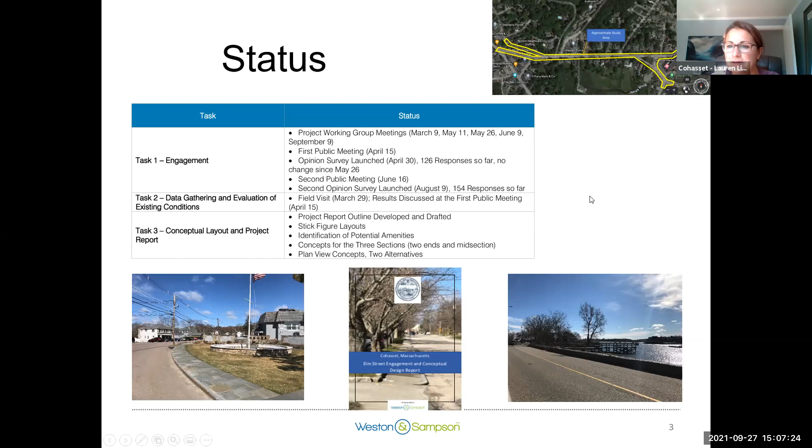All right, so at this point I'm going to turn it to Jeff and let him go through the changes to the alternatives that I just mentioned.

Thanks, Jim. So on alternative 2 on the village end, one discussion point was the connection to Highland Ave, and there was some concern with parking in that area and maintaining access. What was batted around last week was that perhaps the town could allow specific resident permit parking for 3 or 4 spaces to replace people pulling up onto Highland Ave, so you don't have cars cutting up into Highland Ave and backing out onto Elm Street across the new sidewalk areas. This hasn't changed, but it could be moved as we move forward in preliminary design if desired.

Go ahead, Jim, to the next page. Can I ask a question? Go back, please, because the consensus was that they were not going to do one-ways, so this is still showing the one-way configuration. That's Jim's fault. You probably don't have the other one up, Jim, so you're muted.

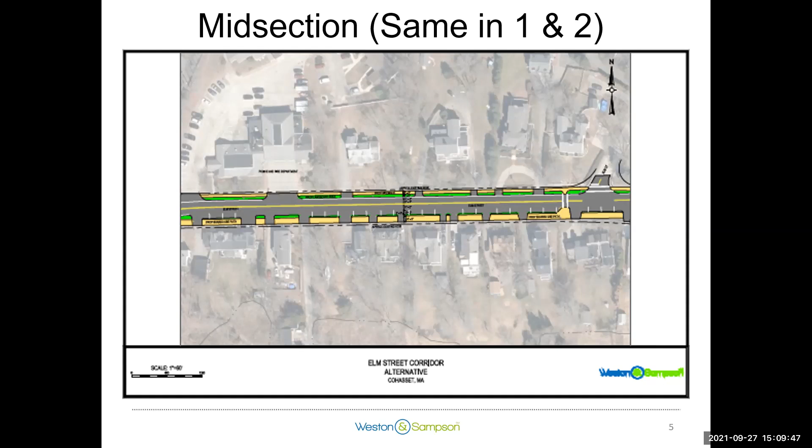Jim, go to the next one - this is zoomed in based on a conversation last week. We adjusted some cross-sectional elements to minimize the footprint. The sidewalk on the south was shown as 8-foot, and we're calling it a proposed sidewalk rather than a shared use path, just because that connotation pushes MassDOT and others into thinking it's a 10-foot minimum. This allows it to just be a wide sidewalk usable by bicyclists, younger bicyclists, pedestrians, etc. We'd still look at sharrow markings and possibly signage to get more seasoned, comfortable bikers to stay on the roadway.

One recommendation from the chief was to provide a 9-foot parking stall here instead of 8-foot, adjacent to the 11-foot travel lane, to give a little more room. On the north, we bumped the shoulder from 1-foot to 2-foot, giving a 13-foot width across. We've pulled the sidewalk to the front along the roadway, and right now I'm showing proposed grass because underneath is some old pavement from the old sidewalk, since there's no parking on the north. We've shown approximate locations of a couple telephone poles - there are a couple locations where the pole is more in the middle of the sidewalk. In those areas, we recommend bumping the sidewalk out a little to create more width on the backside to accommodate ADA considerations.

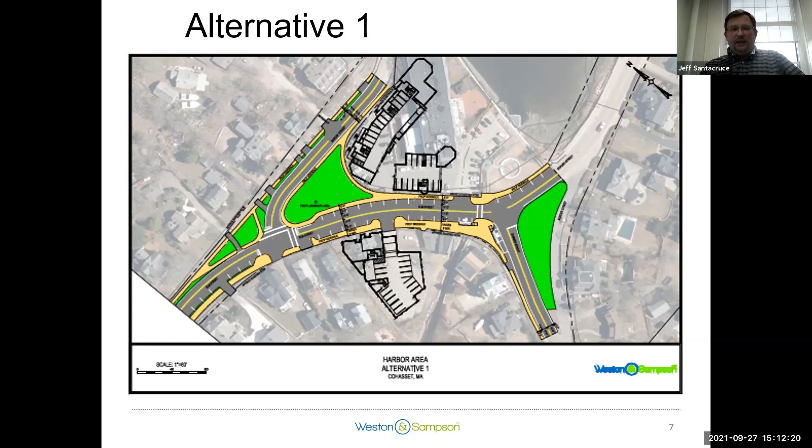So Jim, if you want, I can show that on the next slide. So this is what we adjusted. We basically carved into a little bit of the green space and created 5 more parking spaces here along this stretch.

And as you can see on the north side there, we pulled the sidewalk right up close to the roadway, to keep from having to deal with some steep walls and grading up to a few of those houses along the street. And we're still keeping 24 feet of pavement.

One consideration was how many more parking spaces we could get. The only concern is as we get toward that corner on Margin, the roadway curb to curb starts to narrow up. Certainly once we get into real preliminary design instead of conceptual, looking at actual CAD drawings and utility pole locations, there may be a possibility to add 1 or 2 more parking spaces and shift the road a little bit.

But to be conservative for now, we left it at this point, knowing it's easier to add an extra parking space than to show the public 6 and have to take one out later and have everybody question it. So, any specific questions on this one?

Yeah, I got a question. The curb cuts for the driveways - graphically, it looks like the asphalt from the roadway goes to the property line. And I would imagine there would be a drop off, like 2 feet from the roadway, and that the sidewalk would actually run in.

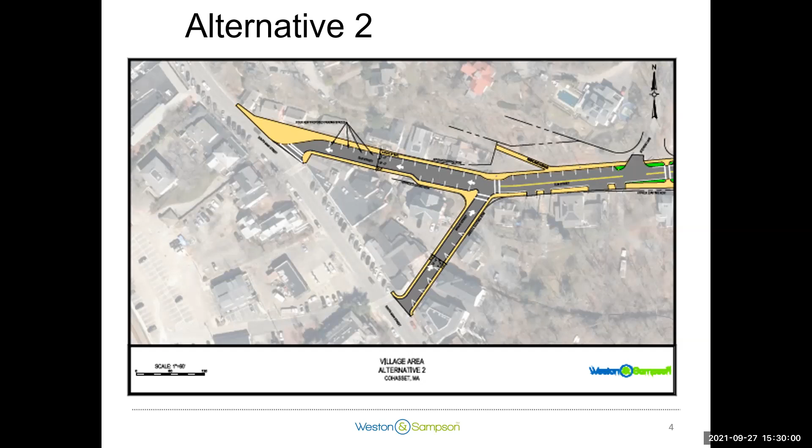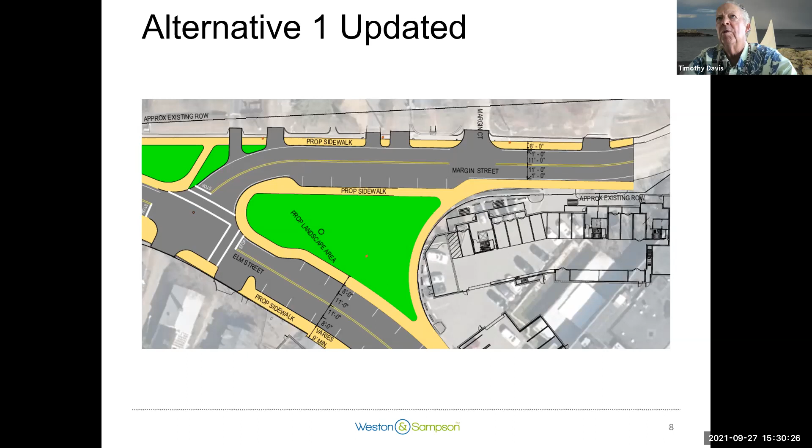George, I think there are a lot of people that like to have that one-way configuration, but we really do need to work on parking before we do. The consensus was leave it as is for now, but we'll address that hopefully when we're addressing the greater village issues.

I agree. I think the only issue with the intersection of Elm and South Main is that the pedestrian crosswalk is removed from the corner, and that's very confusing for pedestrians and motorists. The existing condition now - right, because you have no crossing across the end of Elm on that side of South Main Street. Correct. Yep, I hear you.

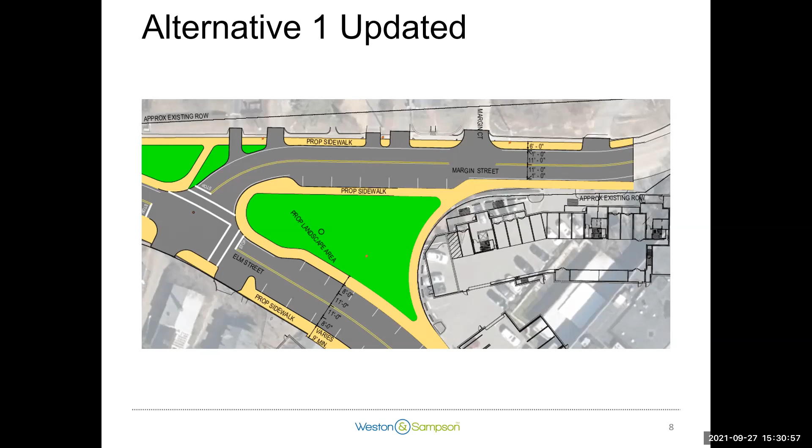All right, thank you. I think the chief has got his hand up. Can we back up to that middle section real quick? I just didn't know if I saw something or didn't see something. I know there's been a lot of conversation in the last two weeks about a crosswalk at Elm Court and Elm Street. Is that in here someplace on one of these slides?

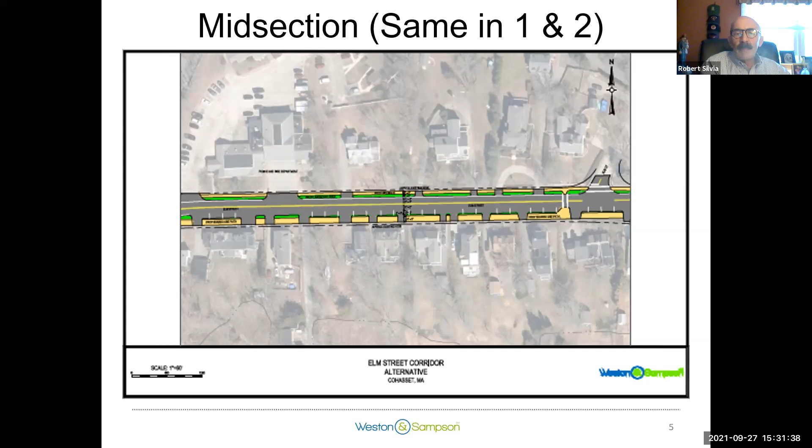I did not show it on this one. I think we decided we were going to put it in. Yeah, it's in the right-hand side of that plan, you can see it. It's just not in the blow-up because we were trying to condense it to a section that was easy to show. So it'd be over to your right-hand side, but it was still being shown.

I didn't see it at first, that's why I asked the question. It's one of those things that seems to be getting a lot of traffic at the present time. Yep, no, it's definitely still shown. There's that one there, and then obviously the ones at Margin and the realigned intersection, as well as one at Stevens. So that can accommodate the people coming from the elderly housing community, I believe, out behind the fire station.

Thank you. I think Jason has his hand raised.

In that midsection, I thought we were leaving the grass strip out on the edge to incorporate those utility poles so that they're not in the sidewalk. That was one of the discussion points we had mixed reviews on, but the concern was that the small grass strip would be difficult to maintain.

So that's why we recommended in the detail section, when we met with Mike Sardina, not to have the grass strip. But if we want to change that, that's for discussion. There are some spots, Jason, where those poles move a little further north, so even with a grass strip on the front, some poles may still end up in the sidewalk. With this option, we could do a short section of widened sidewalk into that proposed grass area to help get around those poles more easily.

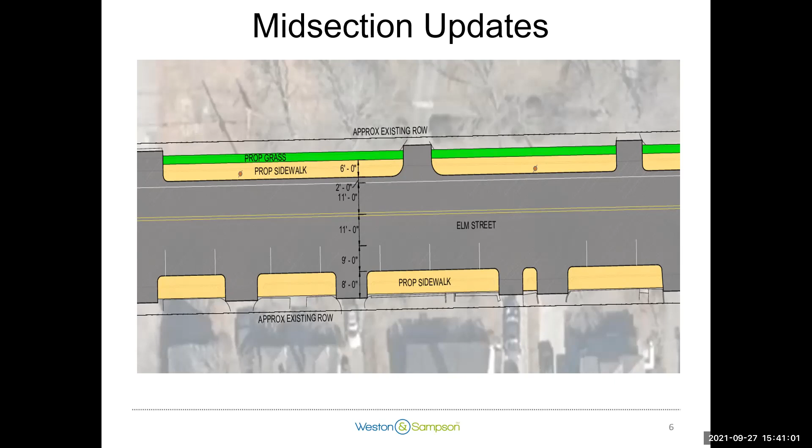I think that's a really good point, Mike. Thank you. Anybody else have any questions? I'll give it back over to Jim and let him kind of go. I think we're at the next section, Jim. Yep.

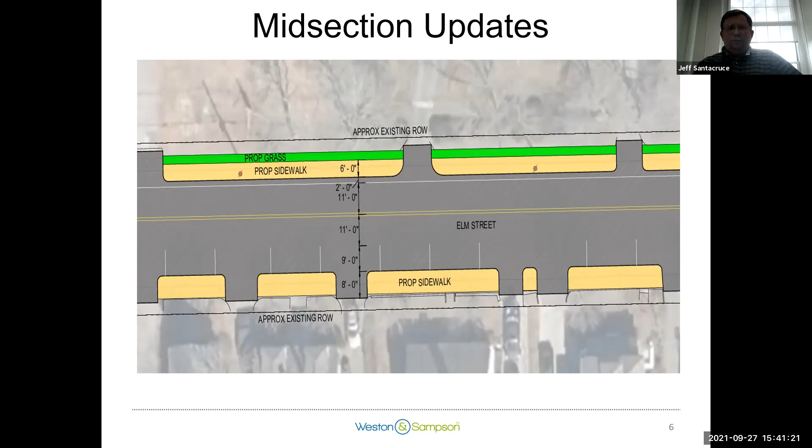Okay, next item to discuss is the public forum. What we've done here is outline what we thought would make sense to cover. So one question is how much detail should be included in the initial part of the presentation, whether we should do a sort of 10-minute thing up front, going through as reasonably quickly as possible to give people the opportunity to comment, or want to go through more detail than that.

Another question is whether to include the undergrounding of utilities, the decision making about whether that was practical or not. It's in the report, wasn't sure whether you want to air it out in the public forum or not. But other than that, main topics would be project background, what the study area is, engagement, what we've heard so far from folks through the public survey and meetings, observations from existing conditions, go through the conceptual layouts, and then budget and next steps.

Just a quick comment on underground utilities. I think that you would get some aesthetic and functional benefit from having underground utilities at the end where the harbor project is. Elsewhere, I don't think so. If there's a hybrid approach, as opposed to like, okay, it's $10 million to underground all the utilities in this whole corridor area.

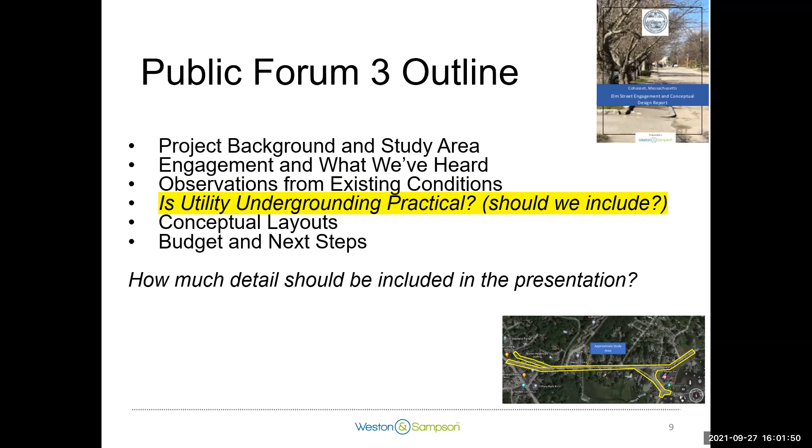I can't see everybody's hands and everything. Any other questions at this point? Doesn't appear to be. Okay.

So quickly, next stages of design include budget level design and permitting design, budget level being around 30%. Figure that to be in the 220 to 230 range, roughly the same for the permitting design. It's about the same level of advancement. And then the permitting itself, we think that's probably in the $30,000 to $40,000 range.

Public engagement, continuing meetings like this, more public forums, maybe some stuff in person, about another $50,000 to $60,000. And then final design, our understanding is you want to do this, roughly speaking, like a design build sort of thing with your on-call contractor in the town. So final design would be done in tandem with construction, built into the construction phase.

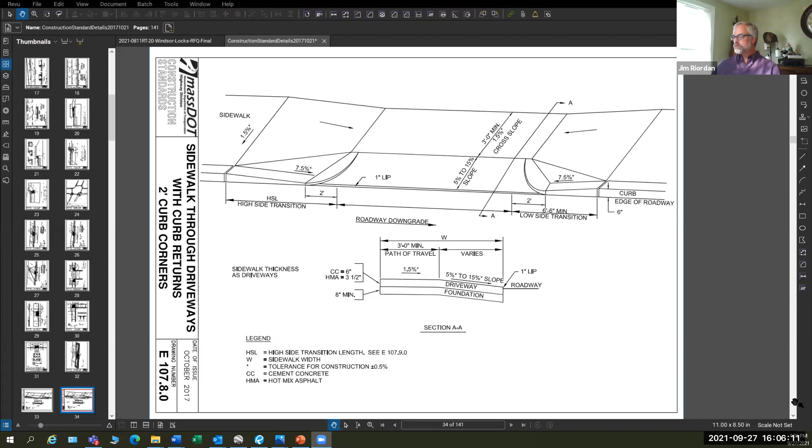And yeah, oh yes, it's coming up now. No, did it disappear? Which screen are you seeing?

That's the driveway curb detail I was talking about, Clark, where it goes up at the front. There's a little drop down on both sides to help the driveway. That's one option, with a straight curb and 2-foot curb corners on it.

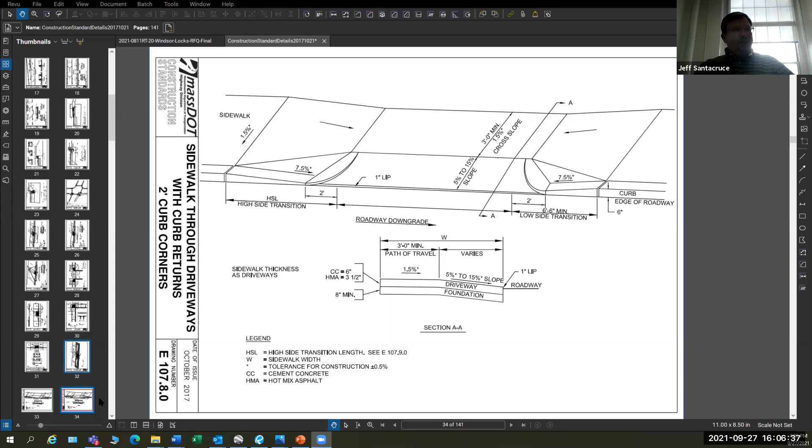The other option you can do is just a straight-in section, so there's no curve. Those are the two options we can utilize that every contractor in Mass knows how to build, so it's not like we're reinventing the wheel.

I thought I'd share that, and I can try to put something in the plan somewhere that shows the public that the sidewalk is the dominant piece through the middle, and then the driveway comes across. That's an important thing to convey as part of the graphics for the project.

Awesome. Well, thank you for bringing it up. I appreciate that.

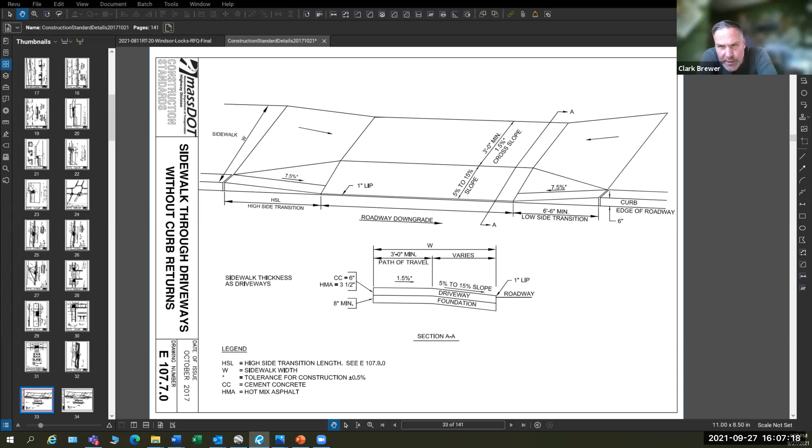There's both where the streets are, and the driveways might have a slightly different treatment. At the streets, the sidewalk would actually go down and become a crosswalk, so you wouldn't have this kind of transition at a street level, only at your driveways.

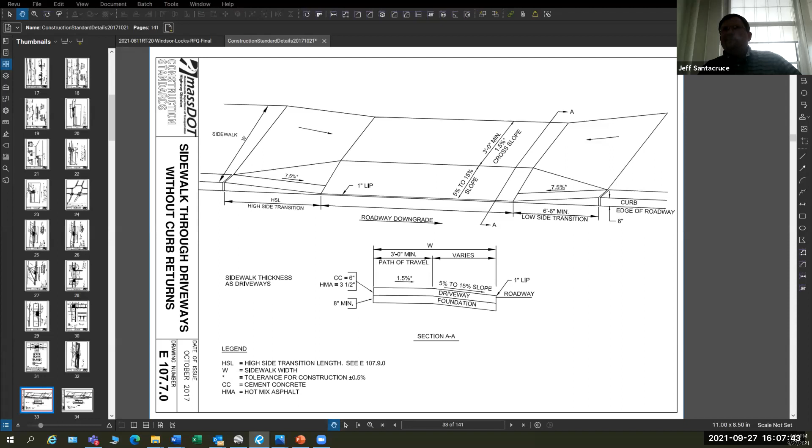All right, now I can't seem to stop sharing. Oh, there we go, found it. Sorry about that, thank you. I just figured I'd show that while we were still talking plans. Appreciate it, thank you.

Jim, you're on mute. Does the report cover up where folks can see it? Yes. All right, great. So, report cover.

Let's go down through this a little bit, just real quick. I think this outlines what's in the report pretty well. There's a general section on background in the study area, the engagement process we've used, data gathering, methods of review, evaluation of existing conditions, the undergrounding of utilities we were discussing a couple minutes ago, and then conceptual layouts and recommended budget and next steps.

This follows pretty much how we're suggesting doing the public forum too, ideas to make these things match up so it's easy for people to follow along. We'll just skip over the undergrounding of utilities.

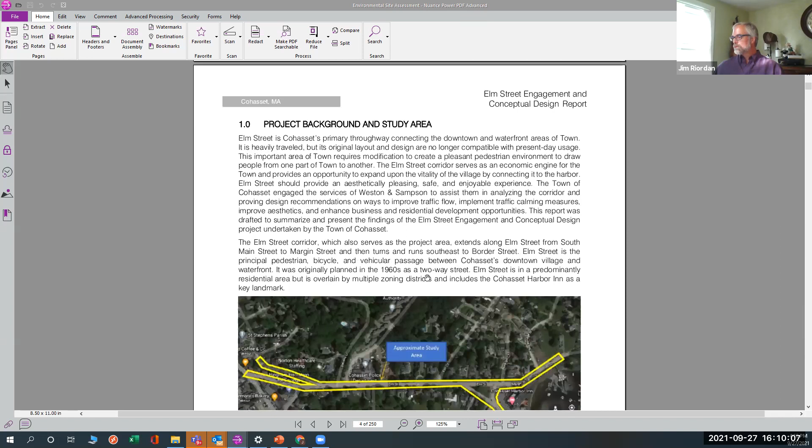So we all know where the study area is - this is how it's presented in the report. Just a brief discussion of the purpose of doing this, which is to improve the view corridor, improve parking, pedestrian and bicyclist safety, and slow the traffic down.

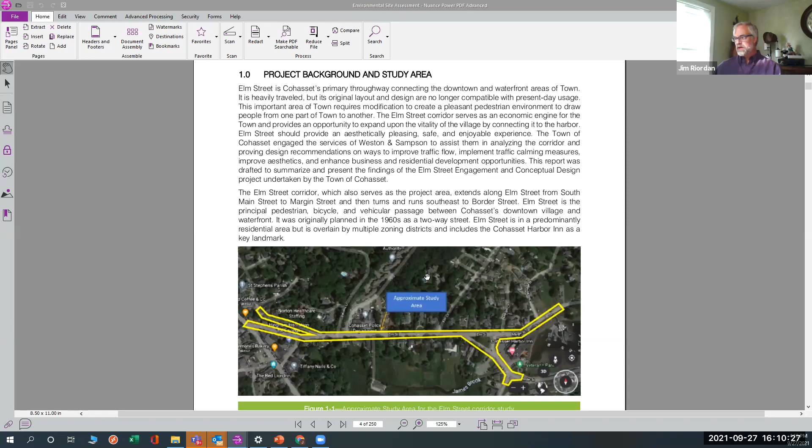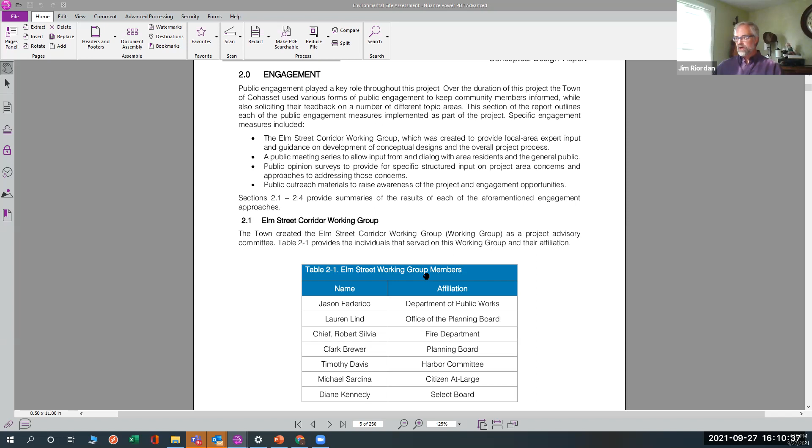Discussion of engagement begins with the corridor working group, which includes all of you, and the public meetings we've held - there's been 2 so far, there'll be a third. We can include the third one in here as well, but we haven't had it yet, so it's not in here at this point.

Public opinion surveys - 2 of those that I think identified some pretty interesting elements that we brought into the design.

Some key things about that in the first one - both of these have very good response rates. The first one had 128 responses, and it's 153 written up in the second one currently, but I think we're up to 154, so I'll just adjust that as needed.

The things to address that came from the first survey, in rank order, were wider streets, adding street trees, landscaping beautification, enhanced pedestrian crossings, adding bicycle lanes, traffic calming, improved street lighting, and wayfinding.

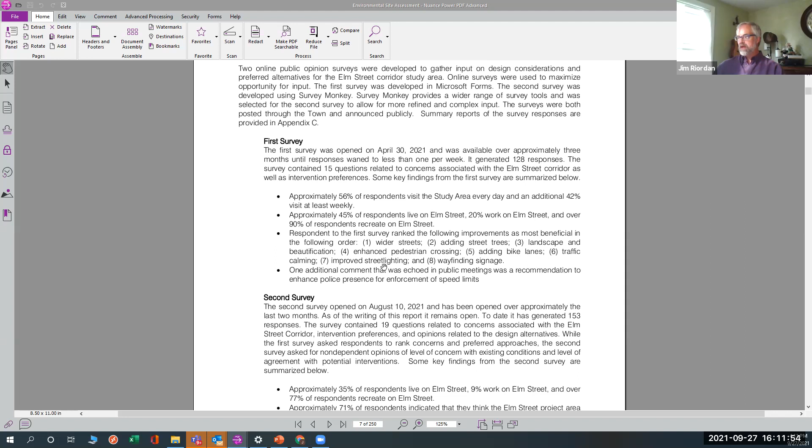And then in the second survey, we got somewhat different information. In this one, it came out that improved pedestrian safety, visual connection to Cohasset Harbor, improved roadway condition, increased roadway capacity for bicycles, and increased traffic enforcement were key elements.

I think both designs add to each of these things in various ways, but we queried folks as to which alternative they felt did the best job of adding these things, by asking whether they agreed or agreed strongly with certain items, just kind of adding those together. We have the percentages in here.

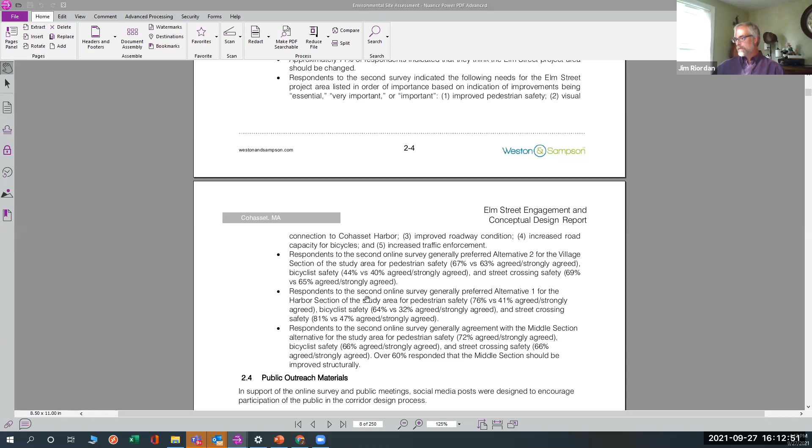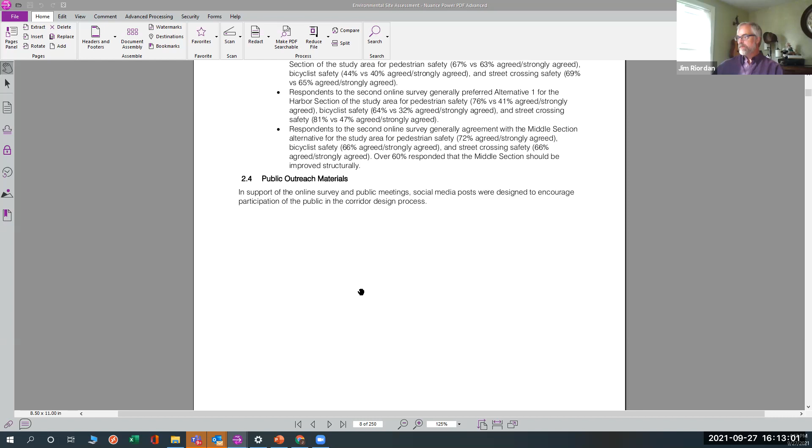Public outreach materials - those included various public meetings, social media posts, invitations, etc.

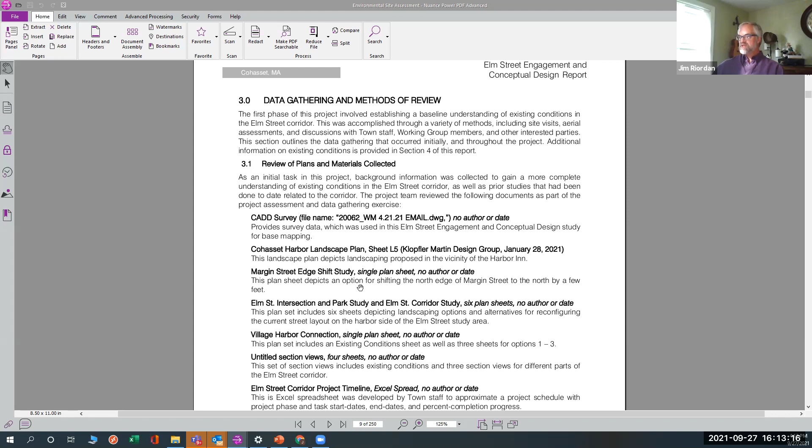Please feel free, if you want, to stop me as I'm going through this and ask questions or raise comments. Next section is data gathering and method of review.

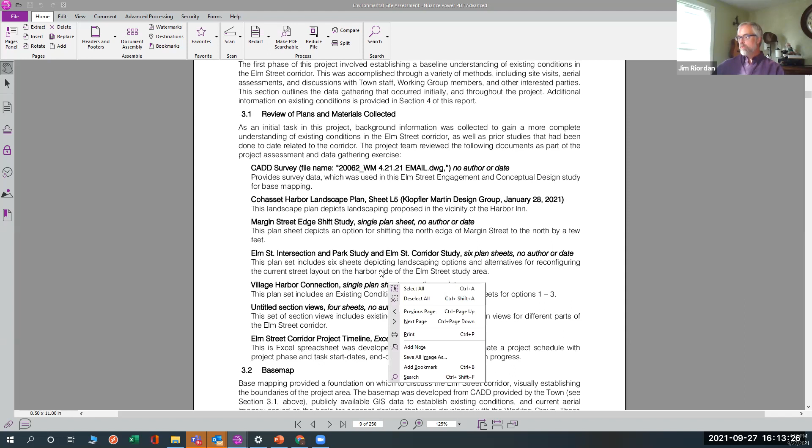Data was gathered from a variety of existing materials. We pulled together base mapping from the survey data the town had already had done, existing GIS information, as well as aerials for the background. Then we conducted a field review, done on March 20th.

Then we get into evaluation of existing conditions, looked at from a few different perspectives: pedestrian access and safety, same for cyclists, automobiles and trucks, basically a qualitative assessment of how safe it is to travel through the area, or what safety concerns automobiles and trucks might add. Also the ability for emergency vehicles to get through the area, and available parking.

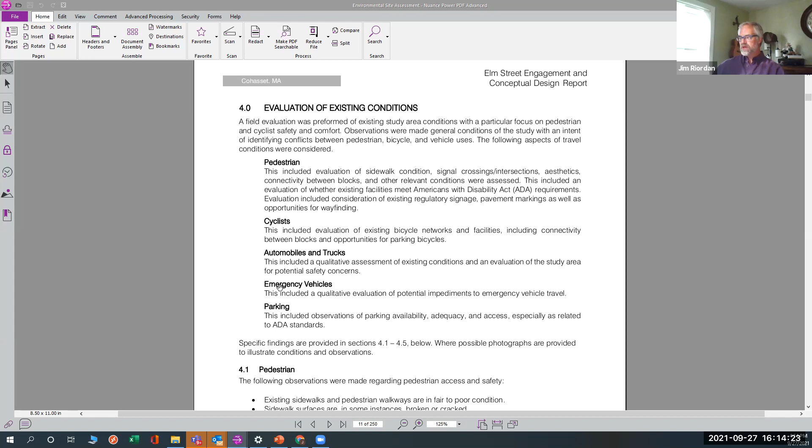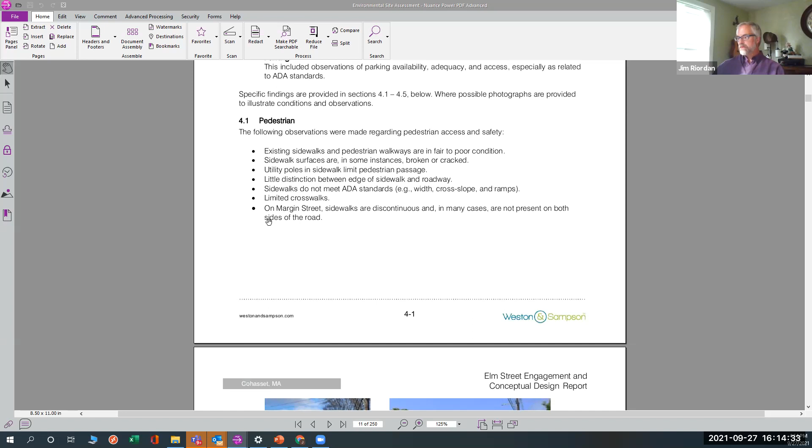For each one of those items, we get into more detail about our findings. We collected some photographic information where appropriate. We included photos - we have quite a number more if we wanted to look at additional ones, but these were just some representative ones to include.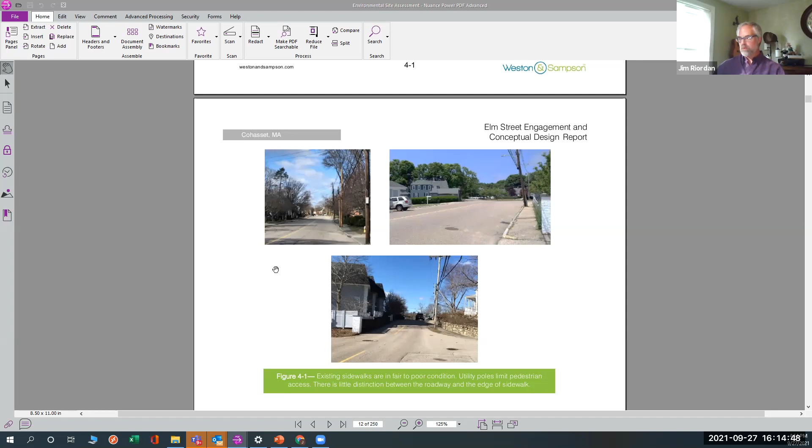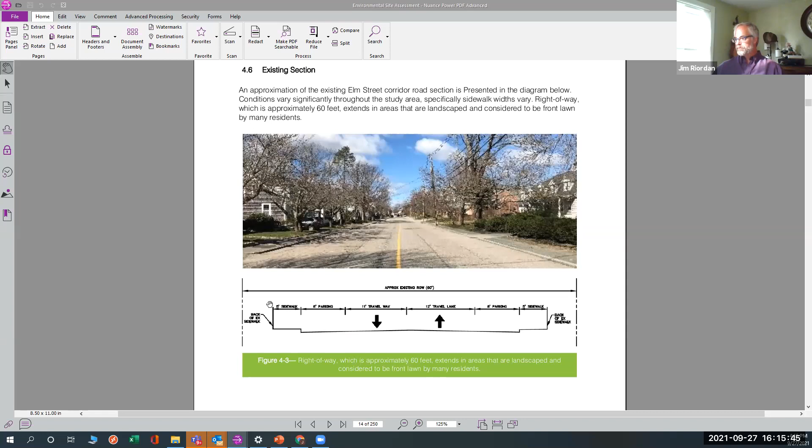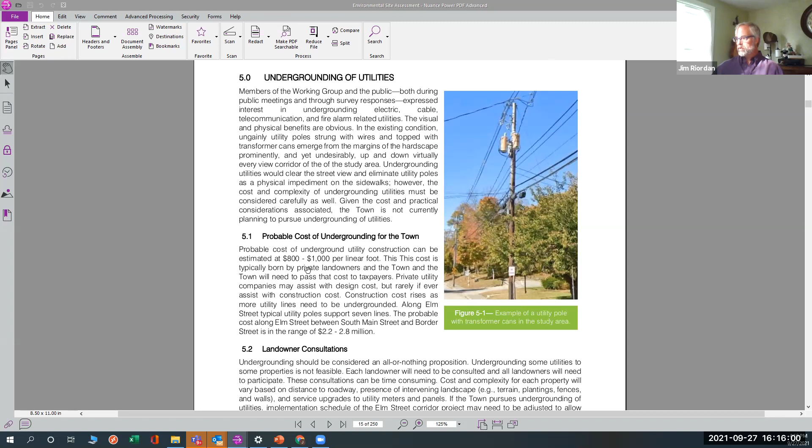This is the undergrounding of utilities section. We talk a little about some of the challenges associated with it, the number of utilities carried on typical poles, and of course the transformer cans that need to be addressed in one way or another.

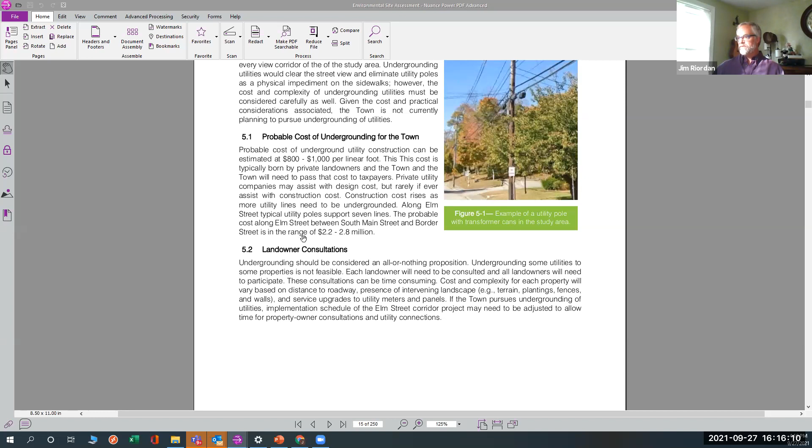We noted a cost range for undergrounding of utilities, someplace in the neighborhood of 2.2 to 2.8 million. Then some of the practical issues - landowner consultations, how that might interrupt schedule and raise complications. Additionally, individuals beyond the 2.2 to 2.8 million will need to fund their own connections.

Then there's the relocation of transformer cans - you take those from up on poles and put them down on the ground. This is an example of what that might look like. We also noted these things are of varying size - where you have more wires, more utilities, you probably need a larger transformer box, and they're not exactly visually pleasing. Plus, some issues brought up earlier - I think Jason was mentioning the flooding of certain parts of the area, and how transformers at grade may not be practicable given that condition.

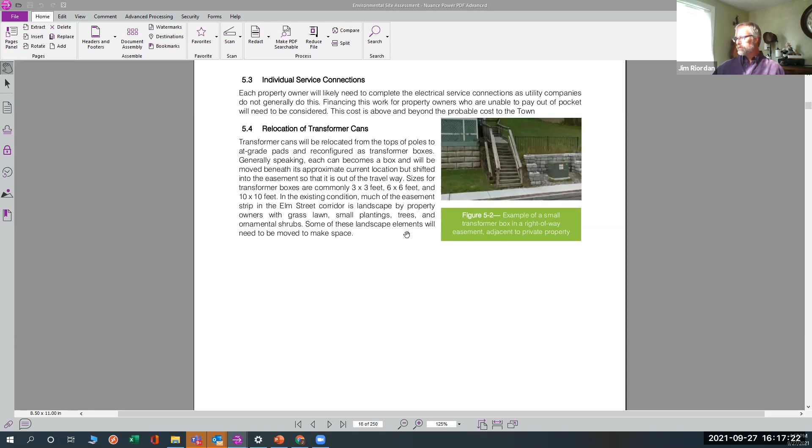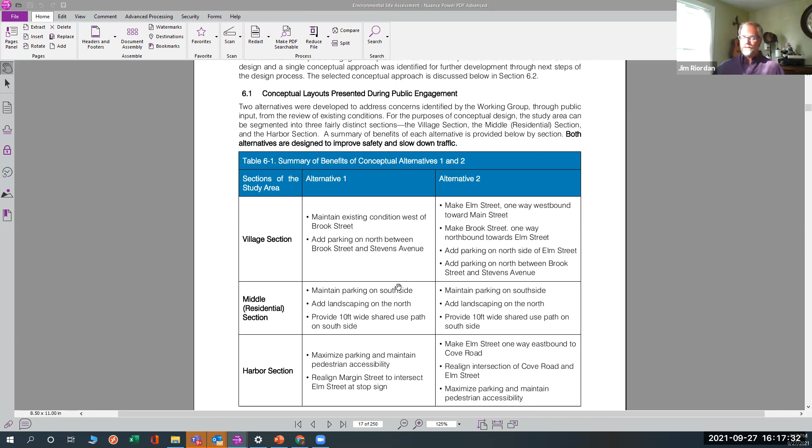Conceptual layouts - we've talked about these things before, what each one of these alternatives brings forward for considerations in the varying areas. And then the selection of an ultimate approach.

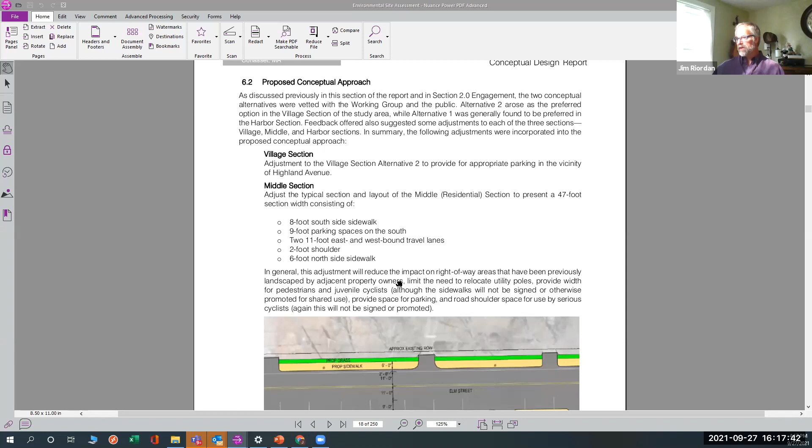We've kind of been through this already, so I won't belabor it too much here, but we took the clips we were just looking at in the PowerPoint, brought them into the report, and explained the changes we decided to make to concept alternatives 1 and 2 to make it work a little better.

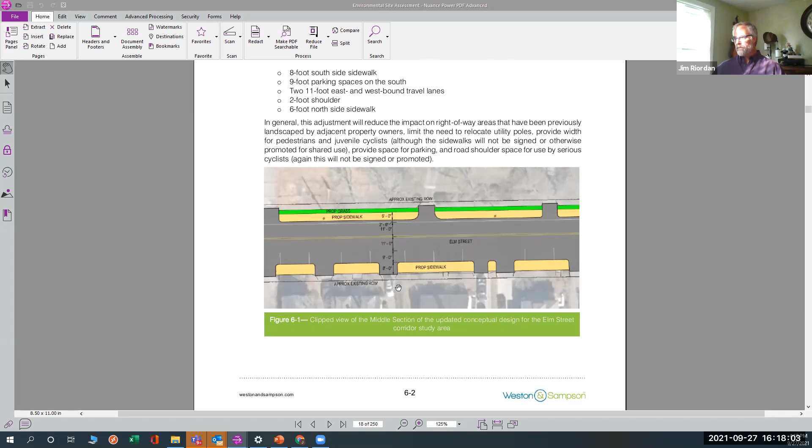Then budget and recommended next steps - we've already been over this too, so order of magnitude cost with the same ranges I was just showing before. That's basically it, except for appendices. So any questions and comments?

I don't want to throw water onto the electrical circuits, but a couple things to consider on that, Clark - the curb reveal is kind of non-existent on that side, so you've either got to take the pavement down or raise the sidewalk up, so you'd be adjusting that curb anyways. And the existing sidewalk width and the path around the utility poles in a lot of cases may not meet current ADA standards.

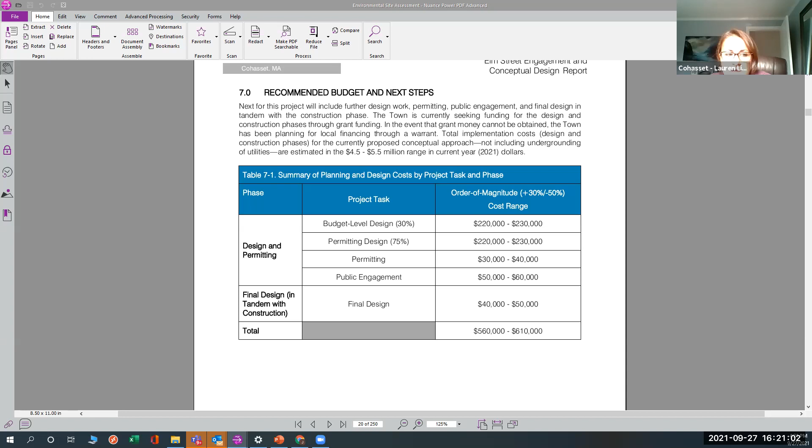Any other comments from the working group or any of our attendees? All right, seeing none, I'd like to talk about schedule next.

In preparing for the forum, we had originally flagged the first week in October, and then ideally the 7th was the remaining date I had people hold. In my opinion, I think we could benefit from another week by having time to review the material beforehand. So I'd like to suggest, pending people's availability, that instead of October 7th, we do either the 14th or the 21st.

I just want to make sure we've gone through everything, looked over any bumps or errors in the slides, and that everything is ready to go. I also think it'll benefit the community to have more time to be prepared, instead of saying the forum's next week. If I can give people two weeks out, that's preferable. I know everybody's really busy this time of year, so I want to make sure we have enough time for people to mark their calendars.

Okay, with pushing the schedule to the 21st, that makes sense to give you the opportunity to do as much outreach as possible.

We're not talking about an in-person forum — this would be a Zoom meeting kind of thing, right? Yes, I'm glad you brought that up. I had been hoping our third forum could be in person, but given how things have been going, I also thought we'd be returning for board and committee meetings, but we're still on Zoom, so we'll have to do this virtually.